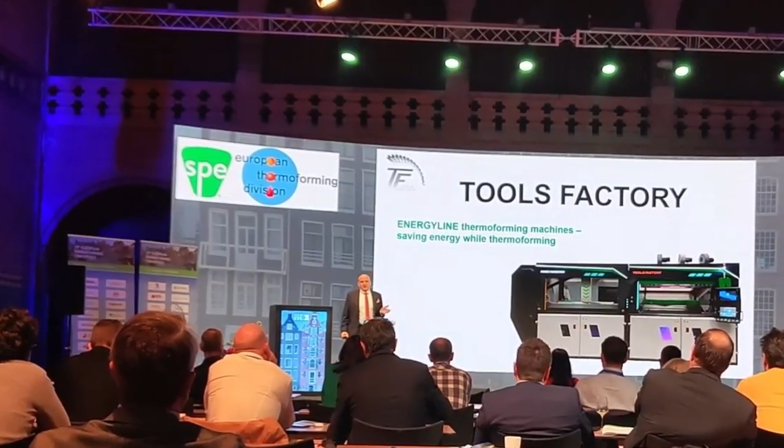As export manager in the Polish company called Tools Factory, I have to wipe out your illusion about our name. We are not a producer of molds or any tools. We are machine makers. We make machines in Poland.

We make plastic processing machines and specialize in thermoforming machines. We came here to tell you about our newest machine, but it's not only about the machine as a mechanical solution. It's also about a different way of heating the material and changing our thinking - how can we use energy for heating? I strongly believe it will be something truly new and interesting for all thermoforming people.

Before we start, I must remind you of one important thing we face in our times. We face the war outside the border - and I don't mean the Polish border, it is the European border. Over 500,000 people were killed in this war. This war is bloody and dirty, and it can come to us sooner or later. This is why I want to remind you first that we must support Ukrainians as much as possible, because they are human beings and they suffer because of the war.

Their houses, hospitals, and schools are burning or ruined, so we need to help in their life because they suffer. But secondly, they fight against a totally different philosophy of organizing society and the world - a definitely non-democratic way of thinking. We have to put something against the authoritarianism of the Russian people, and this is why we have to support them not only in life, but in fight, as much as possible.

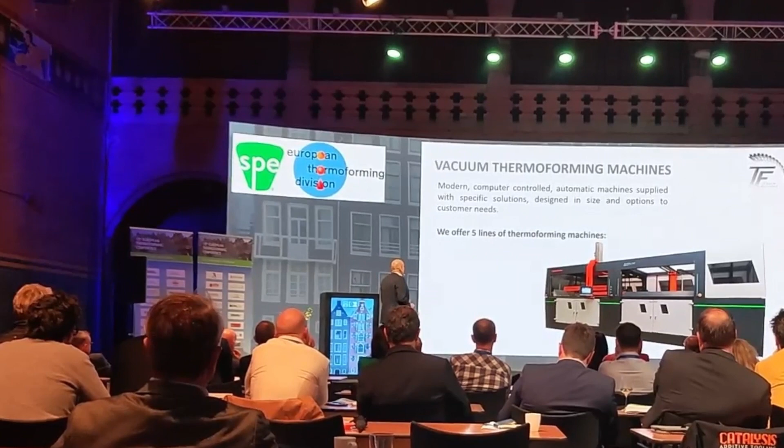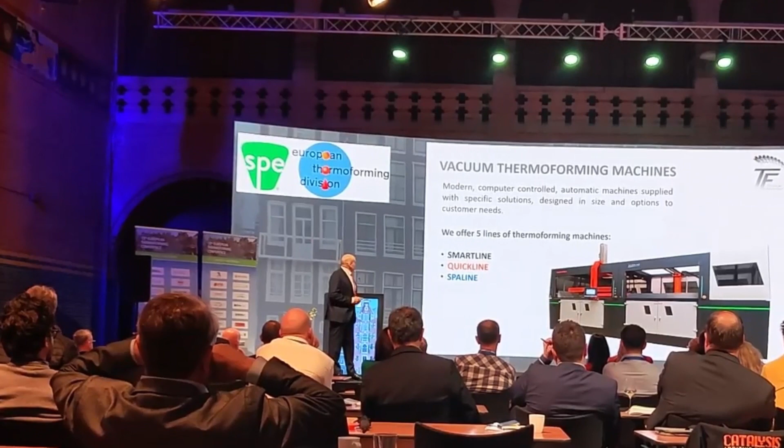The most important for us are vacuum thermoforming machines, which are of course modern, computer controlled, etc. We produce these machines in 5 different categories: Smart Line, Quick Line, Spa Line, Energy Line, and Twin Line. Energy Line is the key of my presentation, but we will come to this machine a little later.

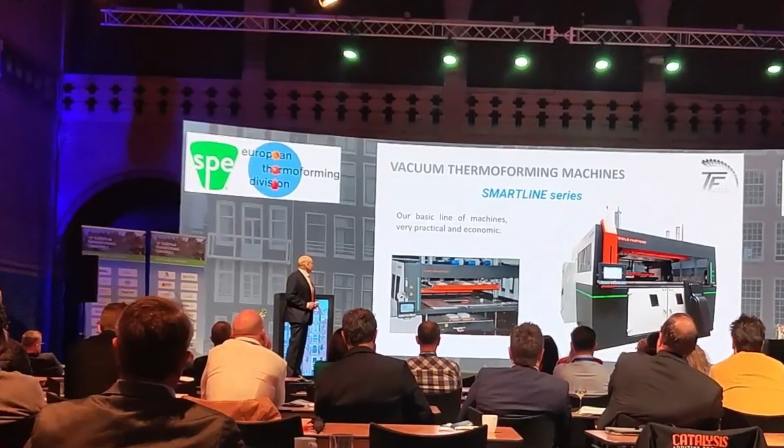Let me first tell you quickly what these names mean in our production. Smart Line is just a basic, very economic standard machine, semi-automatic - you have to manually load the material to these machines. Quick Line machines are upgraded, very fast, to produce as fast as possible, usually supplied with halogen lamps, a sheet loader, and many solutions to accelerate the process.

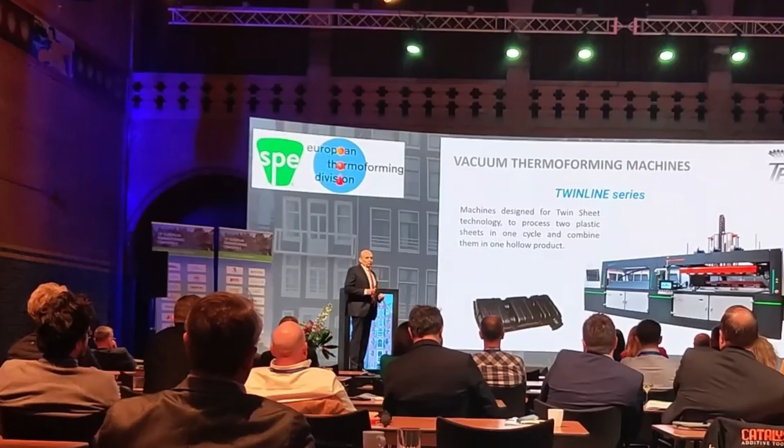SPA Line is definitely a designed machine to produce tubs, hot tubs, and jacuzzis. Twin Line is a machine designed for twin sheet technology, to process two sheets in one process, in one cycle, and combine them into one product.

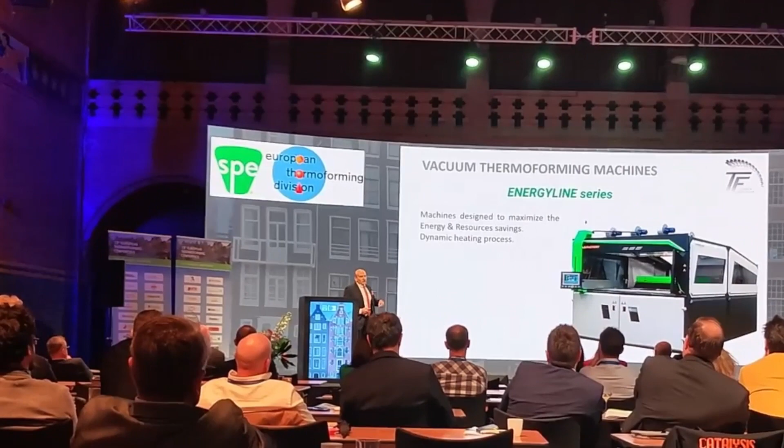So that was the way we started to think: how can we save energy in the thermoforming process? Because we feel responsible for that. And then we designed a new machine, and also designed a definitely new heating process. We call it dynamic heating process. What is it all about?

We call it the new time, because we strongly believe this will be a new way of heating plastic in the thermoforming process. Sooner or later it will be standard. Why? Because it seems more effective - it allows you to save a lot of energy.

What is it all about? We designed and invented the dynamic heating panel. This heating panel is wandering along the forming area from one edge to another. If you think about the idea, you can compare it, for example, to the rotational table in a microwave oven - it also helps to heat the material inside the oven.

So here is the process that we propose for the industry - and the industry is sitting here, we are who are most involved in this process. So this wandering panel, supplied with halogen lamps, is heating the plastic.

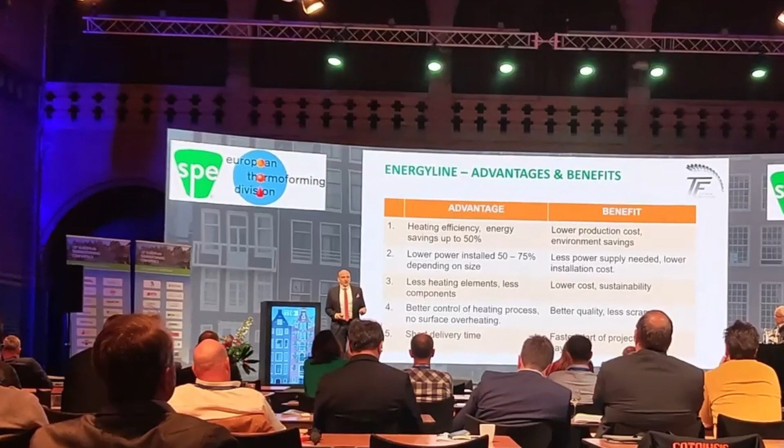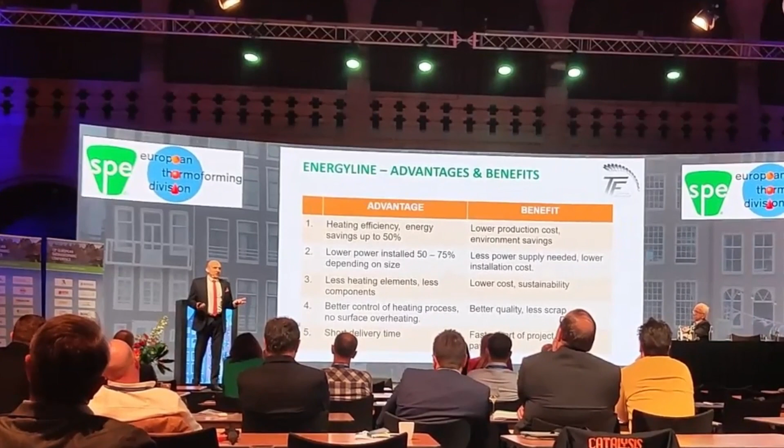Very shortly, advantages and benefits: heating efficiency is much higher. Comparing to quartz elements, we save up to 50%. Comparing to halogens, we save probably 10-15% of the energy - we still collect the data. But the second advantage is that installed power is from 50 to 75% lower. What does it mean for thermoforming companies? Less power installed means less power needed, a lighter installation, lighter electric grid, and no limitation in power accessibility - sometimes that's important.

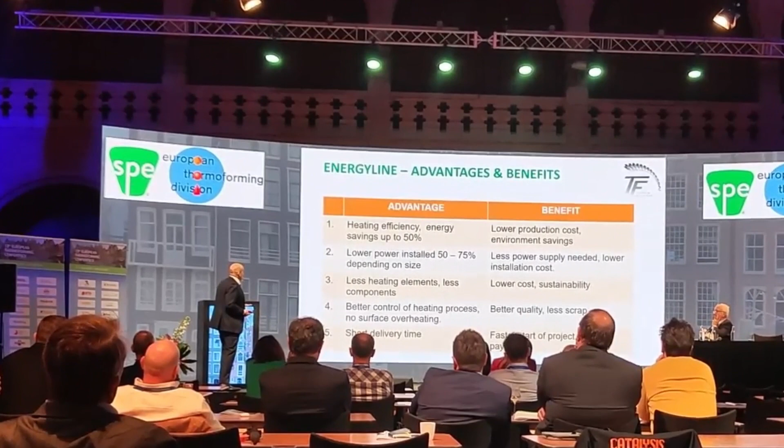Less heating elements, as I said, so we take care of our environment. Better control of the heating process - we make it a more delicate way, I would say, this is maybe the best description. And of course this machine, because we have less heating elements, can be made faster.